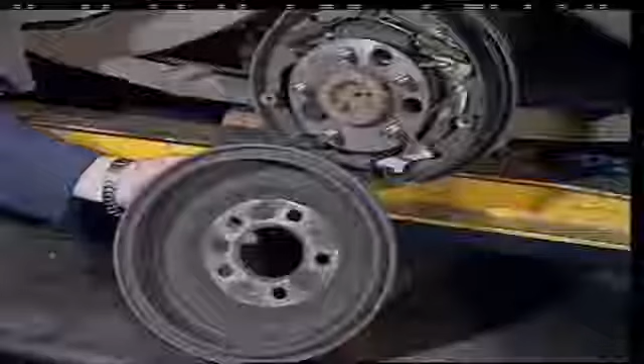This section examines the operation of the drum brake. Drum brakes were once common on all wheels of light vehicles. But on modern designs, they are usually found on just the rear wheels, in disc drum combinations.

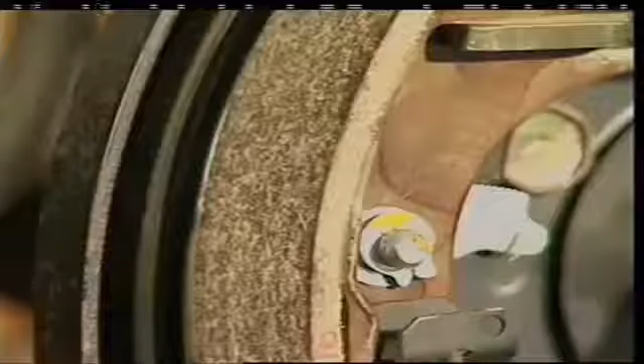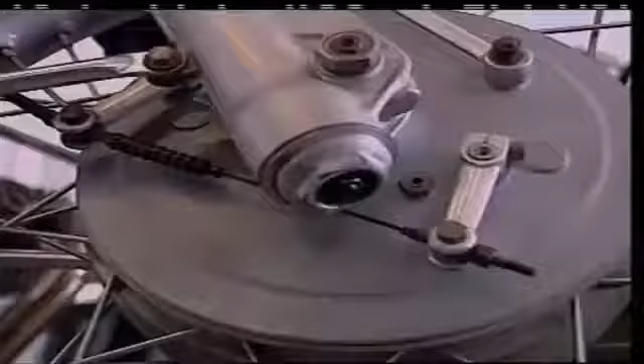The drum brake has two brake shoes with a friction material called a lining attached. These shoes expand against the inside surface of a brake drum and slow the wheel down. The harder the linings are forced against the brake drum, the higher the braking force that is applied. They can be expanded mechanically or hydraulically.

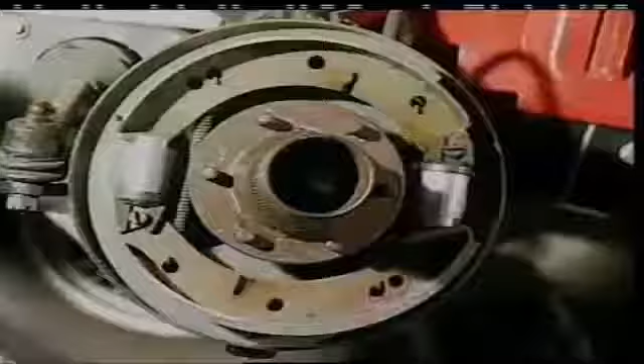The main advantage claimed for drum brakes is that the shoe mountings can be designed to assist their own operation. This is called self-energizing. Less hydraulic pressure is then needed to stop the vehicle, which is why many older drum braked vehicles didn't use a brake booster.

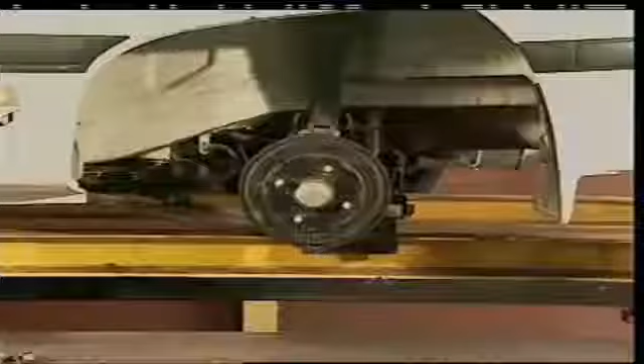The main disadvantage of drum brakes is that the friction area is almost entirely covered by lining, so most heat must be conducted through the drum to reach the outside air to cool. With hard use, this can cause overheating and eventually brake fade. Brake fade is the gradual loss of brake stopping power during prolonged or strenuous use. Very high temperatures occur at the brake drum, and that causes a deterioration in the frictional value of the lining or pad material. It's common in drum brakes.

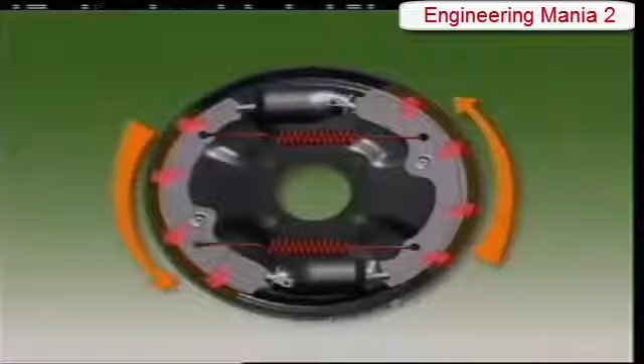Another problem with drum brakes is that it is difficult to get water out of the drum. If a vehicle is driven through water, it takes longer to get the brakes working effectively. Three brake designs are in general use: single leading shoe, twin leading shoe, and duo servo. Each one uses the wedging or self-energizing action of the brake shoe to assist the lining to grip the rotating drum when the brakes are applied.

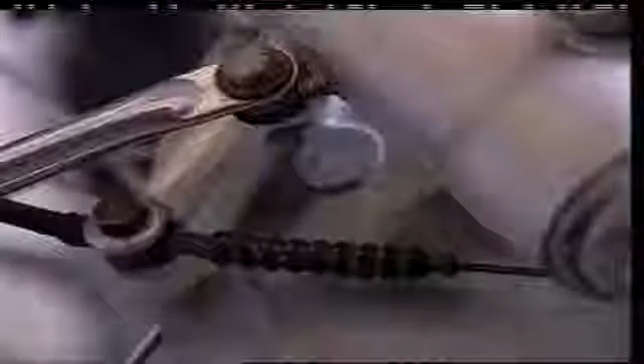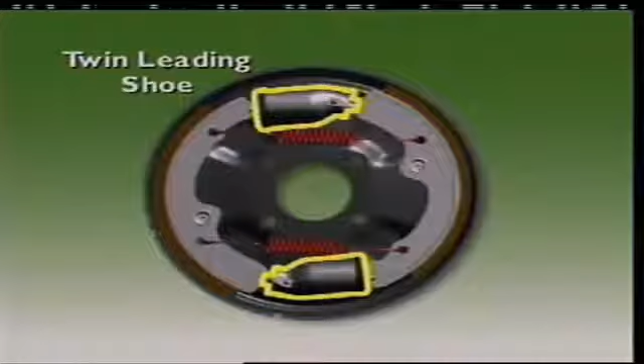The twin leading shoe has an actuator for each brake shoe. The actuator can be mechanical. However, a hydraulic actuator is popular on light vehicles. The hydraulic actuator is called the wheel cylinder. This arrangement has two wheel cylinders with one piston in each cylinder. When the brakes are applied, hydraulic pressure forces each piston to move outwards, pushing on one end of the brake shoe. The direction of rotation of the drum produces a wedging action on both brake shoes, so they are both called leading shoes.

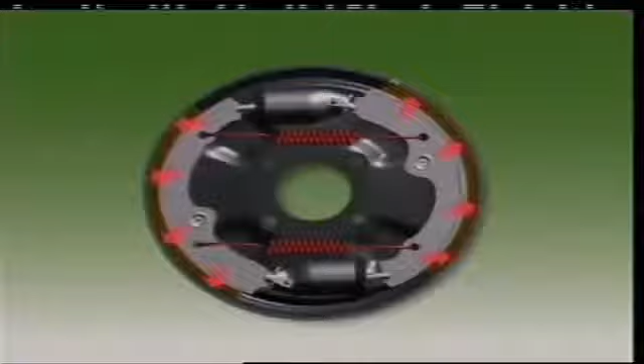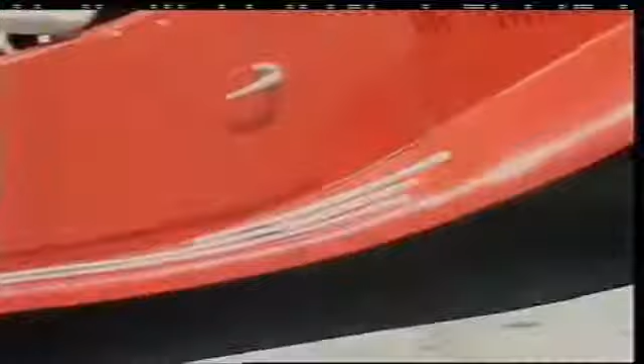This system was once popular on front wheels because it is very efficient in the forward direction. This is due to the self-energizing or self-wedging action of the shoes as the drum rotates. Its main disadvantage is that it is only about 30% as efficient in reverse, so it is usually combined with a single leading shoe arrangement on the rear to provide a balanced system. The single leading shoe system uses a single wheel cylinder with two pistons.

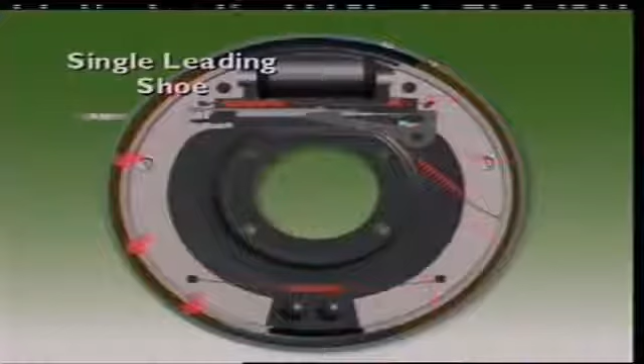When the brakes are applied, both shoes press against the brake drum. One shoe is called the leading shoe, the other is called trailing. The leading shoe tends to be self-energized, while the trailing shoe tends to be forced off the drum. This arrangement is common on rear wheels as they work equally well in forward and reverse, so it makes an effective handbrake. They can also have a self-adjusting mechanism.

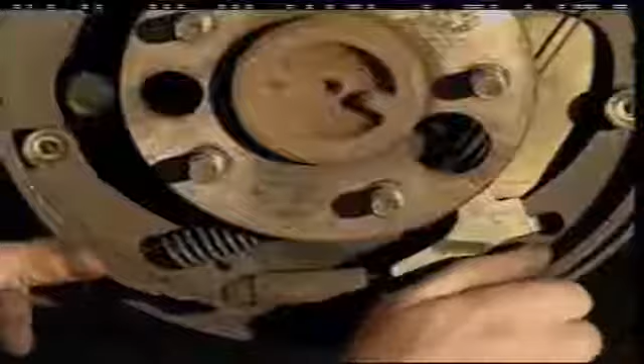The duo servo design also uses one wheel cylinder with two pistons. It is a high energy brake, that is, it exerts large self-energizing forces. The lower ends of the shoes are linked but aren't firmly anchored to the backing plate. This lets the complete shoe assembly float within limits. When the brakes are applied, both shoes are carried around by the drum until the secondary shoe contacts the anchor pin. The self-energizing force of the primary shoe and its wheel cylinder application force is now transferred to the secondary shoe through the lower linkage. Force is then being applied to the secondary shoe from both ends: the wheel cylinder at the top, and the linkage from the primary shoe at the bottom.

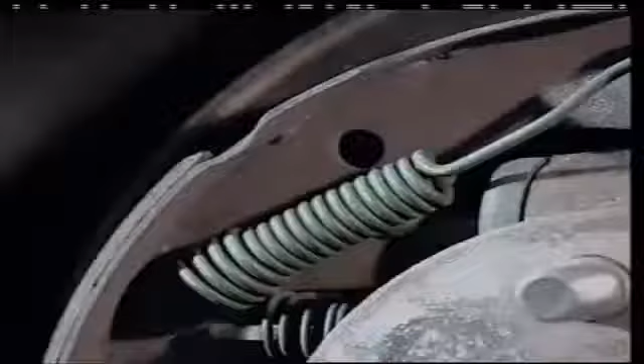The primary shoe has the shorter lining and is always fitted ahead of the wheel cylinder in terms of drum rotation. It's most important that the shoes are fitted correctly, since it's the secondary shoe that does most of the work. The linings may also have different frictional values. The colors of the retraction springs indicate different spring strengths. This design is common on rear wheels and it works well in both directions.

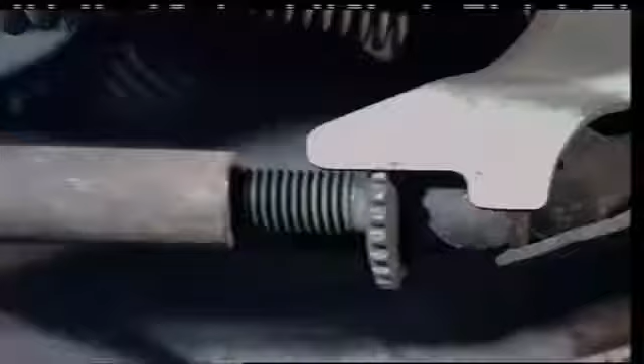Drum brake systems need to be adjusted to allow for wear of the lining. If they are not adjusted, pedal travel will be too long to be safe.

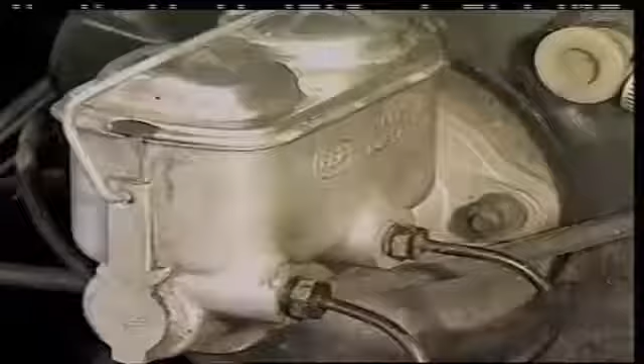This section examines divided systems for drum brakes. Modern drum braking systems use a tandem master cylinder to provide divided or dual line braking. A divided system is safer in the event of partial failure. Fluid loss in one half of the system still leaves the other half able to halt the vehicle, although with an increase in stopping distance.

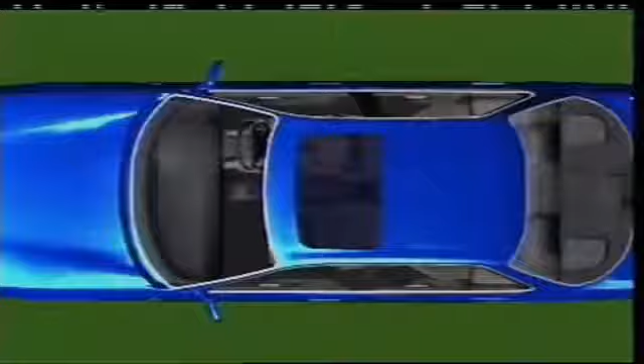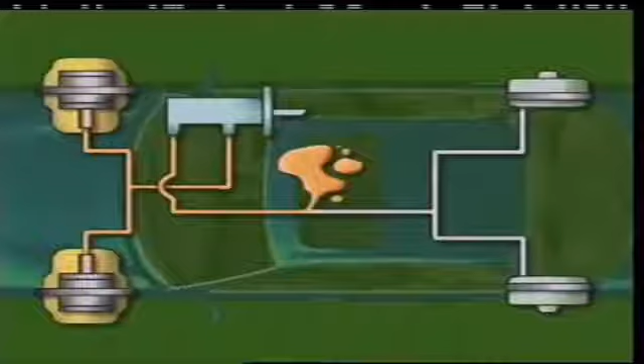A wheel's braking ability depends on the load it's carrying during braking. A front-engined rear-wheel drive car has around 40% of its load on its rear wheels, so its braking system can be divided in a vertical or front-rear split. This puts the front wheels in a different system from the rear wheels. If one half of the system fails, the front or the back, there's still enough separate braking capability left in the other half to stop the vehicle.

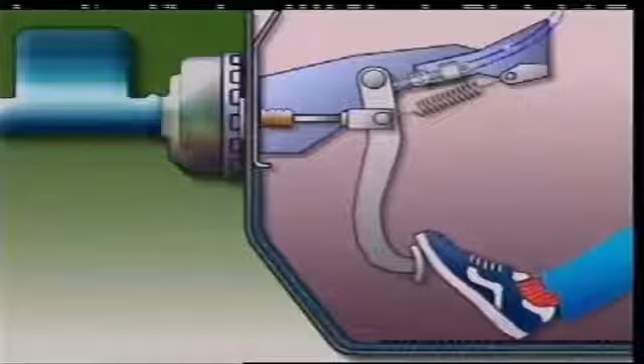This section looks at the brake pedal. The brake pedal uses leverage to transfer the effort from the driver's foot to the master cylinder. Different lever designs can alter the effort the driver needs to make. It is usually suspended from a bracket between the dash panel and the firewall. In many vehicles, the brake pedal is either connected to a switch or in contact with one. It operates the stoplights when the brake pedal is depressed.

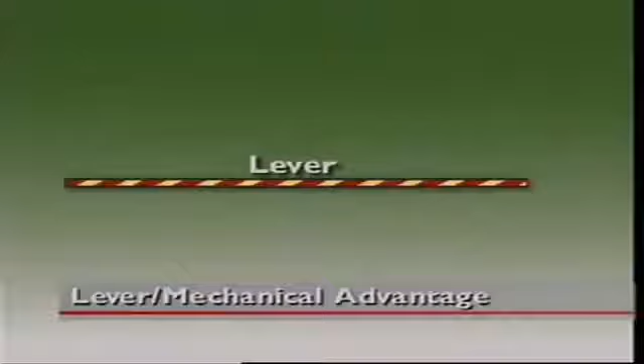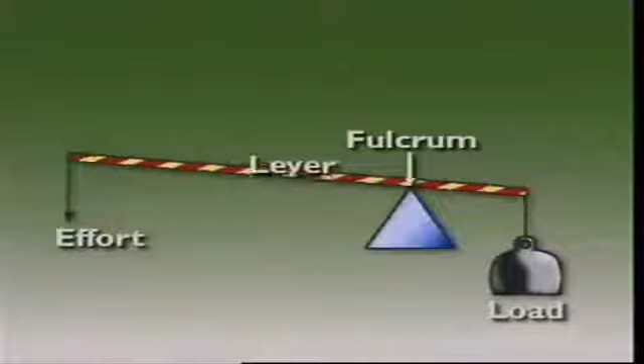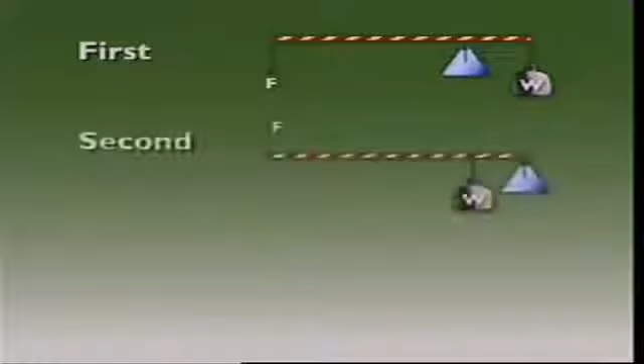A lever is basically a bar which is pivoted at some point called a fulcrum. An effort applied at some point on the lever overcomes a load at some point also on the lever. There are three basic types of lever: lever of the first order, lever of the second order, lever of the third order. They each have their own applications. The ratio of load and effort is called mechanical advantage. Using the right kind of lever in the right way allows a user to lift larger loads with smaller efforts.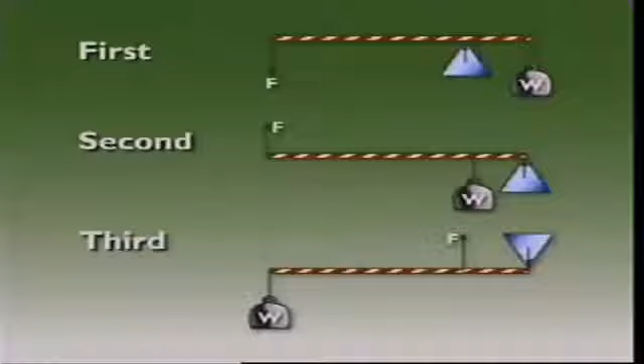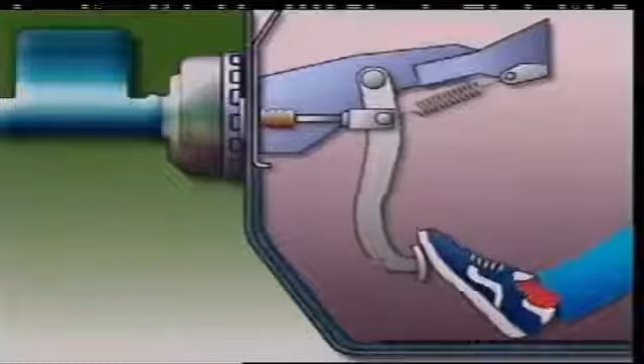This section looks at the master cylinder. The master cylinder is connected to the brake pedal via a push rod. This is a single master cylinder for a drum brake system. Its one piston has a primary and a secondary cup. These are also known as seals, because when force is applied to the brake pedal, the primary cup seals the pressure in the cylinder. The secondary cup prevents loss of fluid past the end of the piston.

An outlet port links the cylinder to the brake lines. An inlet port connects the reservoir with the space around the piston. A compensating port connects the reservoir to the cylinder ahead of the primary cup. With the brakes off, this port connects the brake system with the reservoir. It compensates for changes in volume of the fluid due to heat or wear.

The rod from the brake pedal pushes on the piston. It moves, closing off the compensating port and trapping fluid ahead of the primary cup. Any fluid trapped in the cylinder is then forced through a valve called a residual pressure valve into the brake lines. When the brakes are released, the master cylinder piston returns to its original position. When the piston fully returns against its stop, the primary cup uncovers the compensating port. Fluid ahead of the primary cup can now return this way to the reservoir.

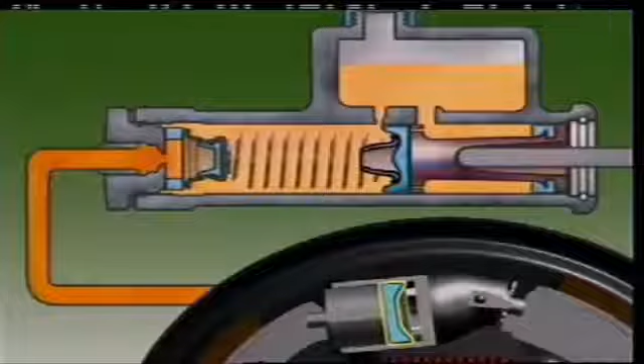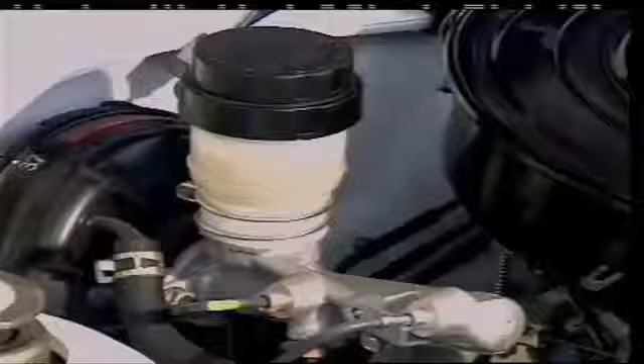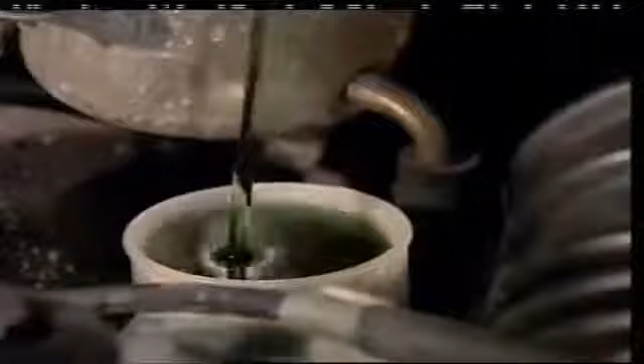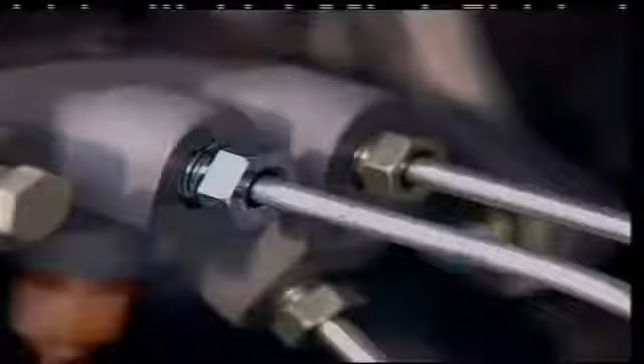With a basic master cylinder in the braking system, any loss of fluid, say because a component fails, could mean the whole braking system fails. To reduce this risk, modern vehicles must have at least 2 separate hydraulic systems. That's why the tandem master cylinder was introduced.

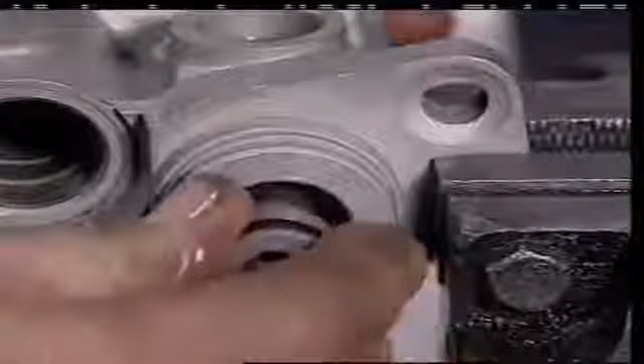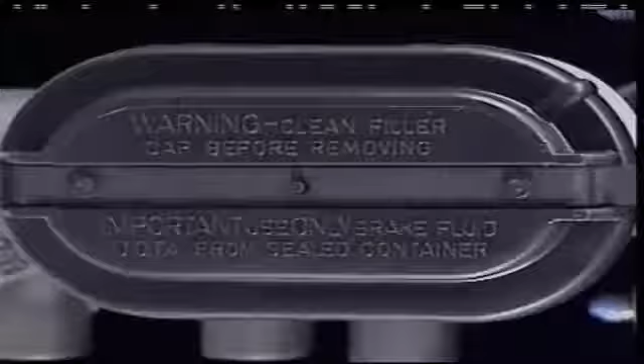Like 2 single piston cylinders end to end, a tandem cylinder has a primary piston and a secondary piston. Each section of the cylinder has inlet and outlet ports and compensating ports. There can be 2 separate reservoirs, or just one, but it is divided into separate sections. When the brake is applied, the primary piston moves and closes its compensating port.

Fluid pressure rises and acts on the secondary piston. It moves, closing its compensating port. Pressure builds up in this circuit. Both pistons then move and displace fluid into their separate circuits and apply the brakes.

If there is a failure in the secondary circuit, the primary system continues to operate normally, but with increased travel. If the primary circuit fails, no pressure is generated to move the secondary piston. So a rod attached to the front of the primary piston will push the secondary piston directly so that it still operates.

A switch can warn of loss of pressure in the front or rear circuits. Or one that warns of low fluid level can be fitted to the reservoir.

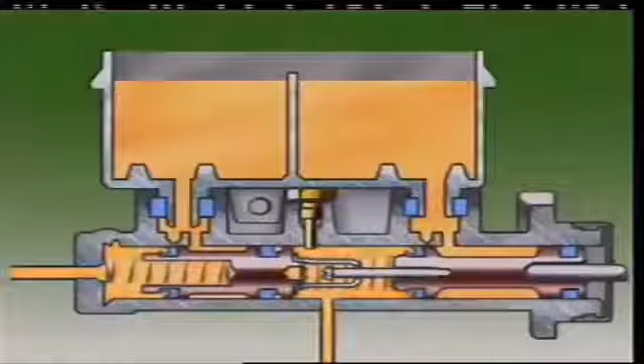The tandem master cylinder, just like the single piston master cylinder, can have problems with the low pressure area developing when the piston returns quickly but the fluid lags. The tandem master cylinder overcomes this by using grooves in the side of the primary cup. These grooves allow fluid to flow from the inlet port into the low pressure area.

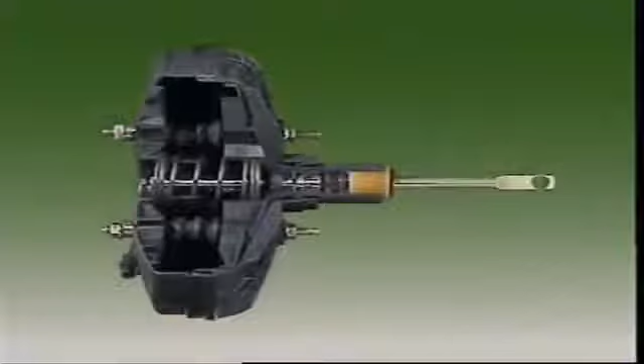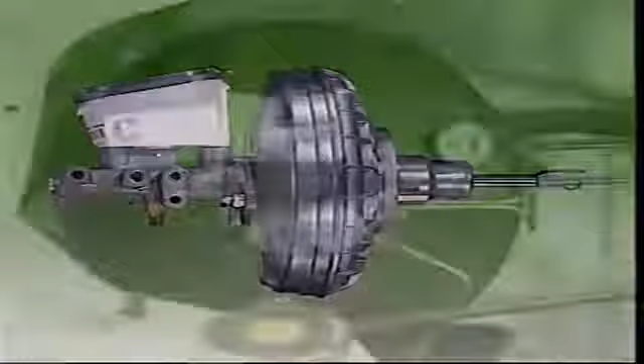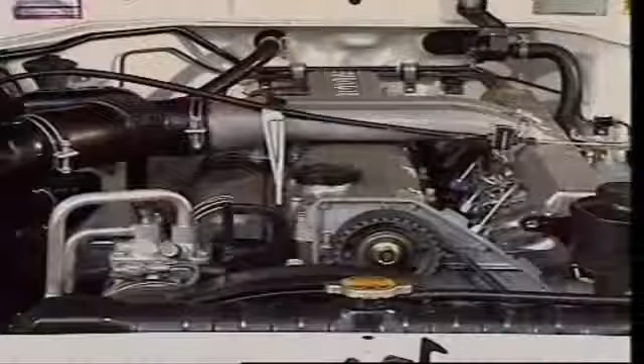This section examines the power booster. A power booster or power brake unit uses a vacuum to multiply the driver's pedal effort and apply that to the master cylinder. This increases the pressures available from the master cylinder. Units on petrol engines use the vacuum produced in the intake manifold. Vehicles with diesel engines cannot use manifold vacuum, so they are fitted with an engine-driven vacuum pump.

The most common booster now operates between the brake pedal and master cylinder. It increases the force that acts on the master cylinder. Whenever the pedal is depressed, the power brake unit assists the driver. The level of assistance depends on the pressure applied.

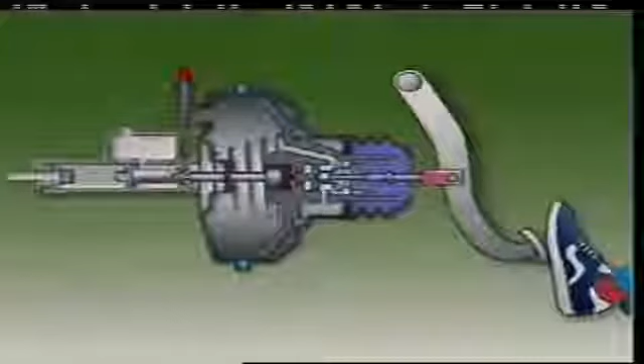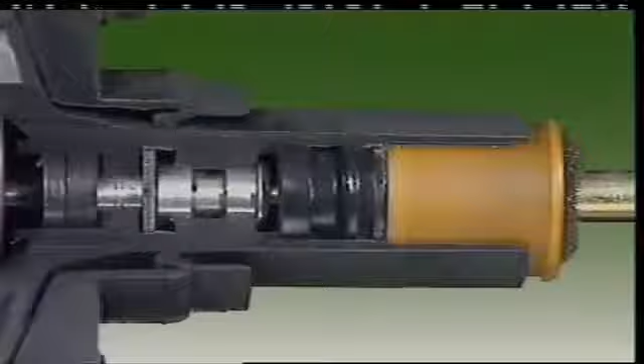When the driver moves the brake pedal pushrod, it transmits movement through the power unit to the master cylinder piston to apply the brakes. It also operates a control valve that admits air at atmospheric pressure to the rear of the unit. How it works depends on the position of the pushrod.

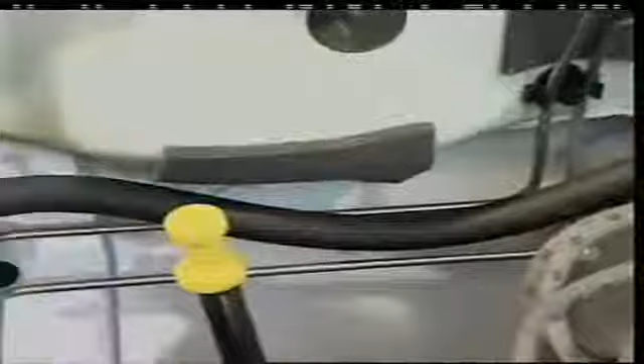A hose connects the intake manifold to a vacuum check valve on the power unit. With the engine running, the vacuum in the intake manifold is used to evacuate the power unit. This valve is held off its seat and a vacuum is produced in both chambers of the unit. The chambers are separated by a flexible rubber diaphragm attached to the diaphragm plate. It is held in the off position by a diaphragm return spring. The master cylinder pushrod and the control valve assembly are centrally located on each side of the plate.

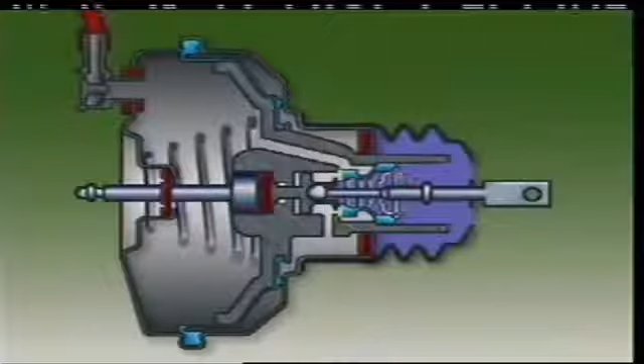As the brakes are applied, the pedal pushrod and plunger move forward in the diaphragm plate. This brings the control valve into contact with the vacuum port seat. It closes the vacuum port, sealing off the passage connecting the chambers. Further movement of the pushrod and plunger moves the air valve away from the control valve to open the atmospheric port. Air at atmospheric pressure comes into the air filter and passages and enters the chamber at the rear of the diaphragm.

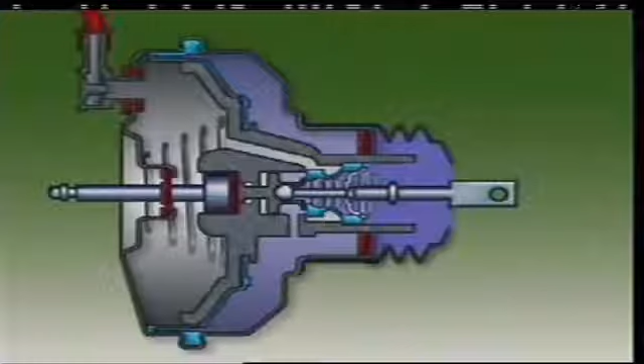The difference in pressure now on both sides of the diaphragm moves the diaphragm plate forward, and it takes the master cylinder pushrod with it. Hydraulic pressure builds up in the brake system to operate the brakes. As pressure rises, a counterforce acts through the master cylinder pushrod and the reaction disc. This counterforce acts against the plunger and pedal pushrod. It tends to move the plunger slightly to the rear, and it closes off the atmospheric port.

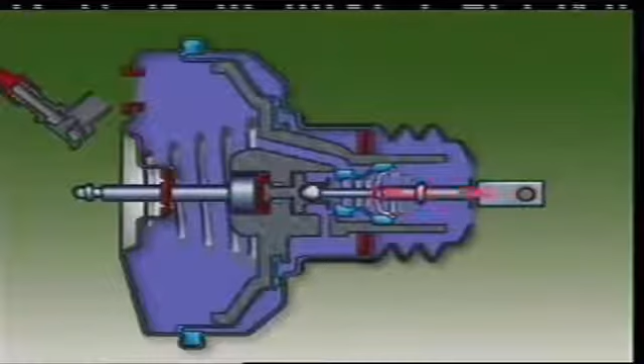If the vacuum source is interrupted, then as the pedal is pushed down, the pedal pushrod and plunger assembly come in contact with the reaction disc. This forces the master cylinder pushrod forward to operate the brakes. The pedal force needed then is much greater than with vacuum assistance.

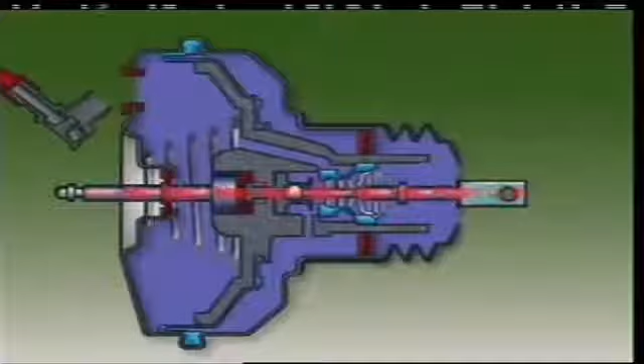During application, the reaction force against the valve plunger works against the driver to close the atmospheric port. With both the atmospheric and the vacuum ports closed, the power unit is in a holding position. It stays this way until increased pedal force reopens the atmospheric port, or a drop in pedal force reopens the vacuum port. With the force on the pedal held constant, the valve returns to the holding position. But if the pedal is fully applied, the plunger moves away from the control valve to open the atmospheric port and give full power application.

When the brakes are released, vacuum returns to both sides of the diaphragm, so the spring releases the brakes. When the engine is switched off or stops for any reason, no vacuum is available. The vacuum remaining in the booster, held by the non-return valve, will provide for at least one power-boosted application. After this, the brakes will still operate, but without power assistance, they require more effort from the driver.

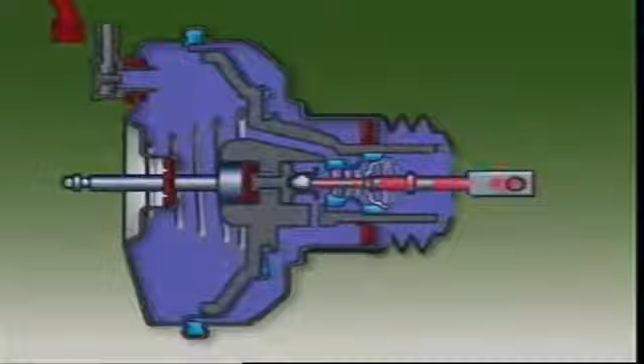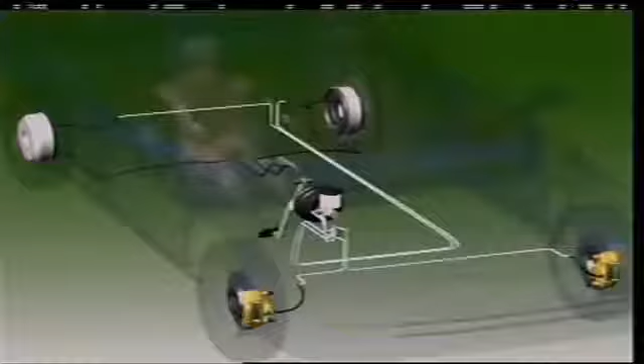This section looks at the emergency brake for a drum brake system. All vehicles must be fitted with at least 2 independent systems. They were once called the service brake and emergency brake. Now they are usually referred to as the foot brake and the park brake.

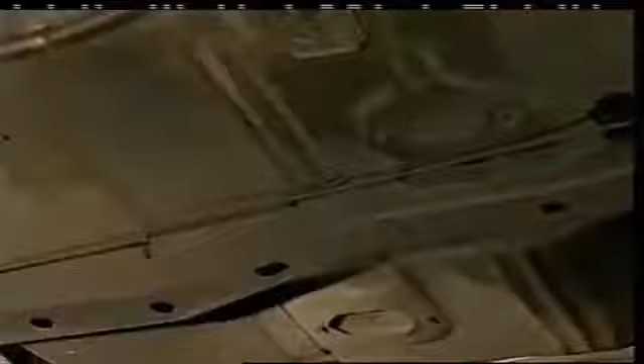Most light vehicles use a foot brake that operates through a hydraulic system on all wheels, and a hand-operated brake that acts mechanically on the rear wheels only. One common use of the handbrake system is to hold the vehicle when it is parked. The systems are designed to be independent so that if one fails, the other is still available.

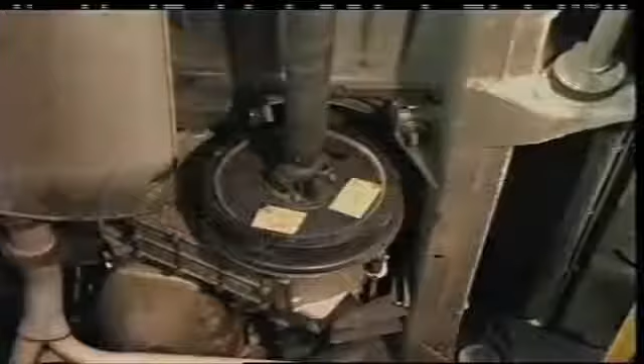This light commercial vehicle uses a single drum brake on the rear of the gearbox as a handbrake. It's sometimes called a transmission brake. On this duo-servo drum brake, the cable for the handbrake lever pulls on an actuating lever inside the brake drum assembly. The actuating lever is connected to the secondary brake shoe by a pin and to the primary shoe by a strut. Movement of the lever forces both shoes against the drum.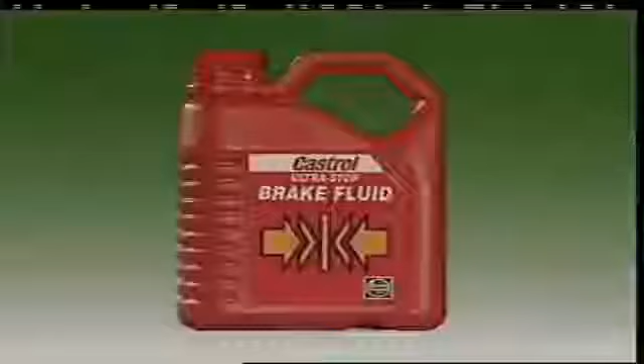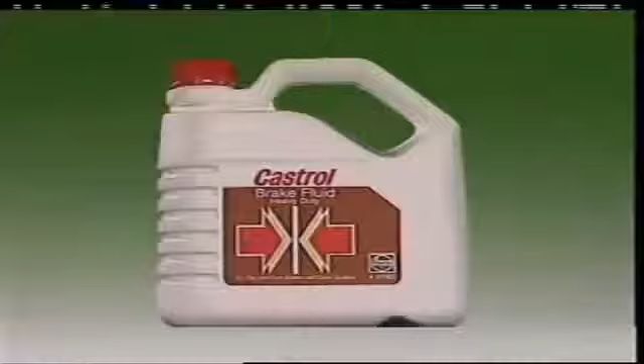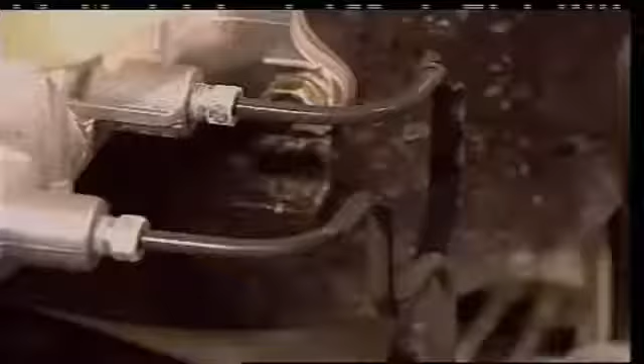This section examines brake fluid. The brake fluid transmits hydraulic pressure from the master cylinder to the wheels. It is a special fluid with special properties. Most are a mixture of glycerin and alcohol, called glycol, with additives to give it the characteristics that are needed. It must have the correct viscosity for hot and cold conditions. Its boiling point must be higher than the temperature reached by the system. It must not damage seals, gaskets or hoses or cause corrosion.

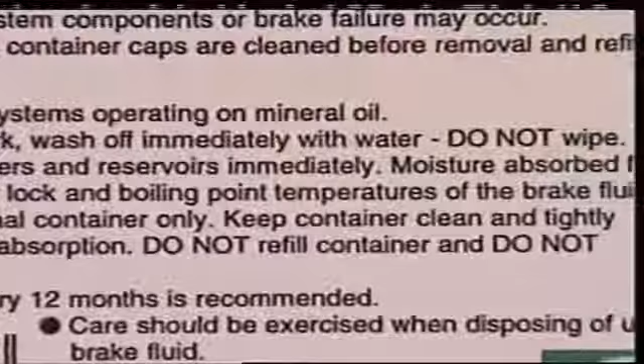Glycol-based fluids meet most requirements, although they do damage paint. And they absorb moisture, hence the warnings. This is important because as moisture is absorbed, it lowers the boiling point of the fluid. Brake fluid should not be mixed with mineral-based oils or solvents. If contamination is suspected, the braking system must be drained and flushed with a suitable solvent and rubber components replaced.

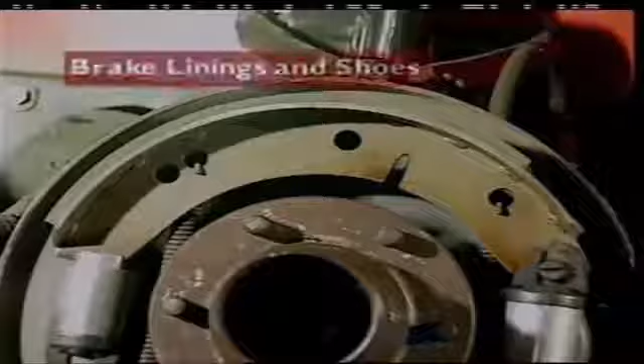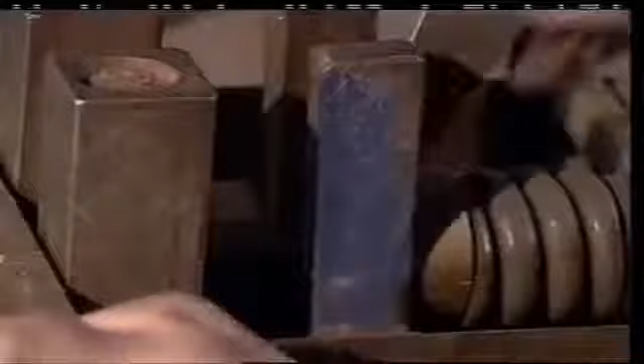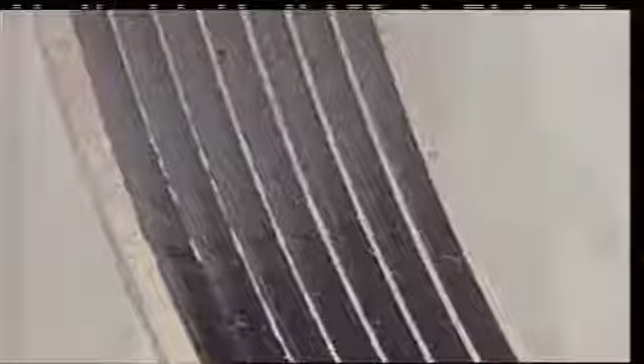This section examines brake linings and shoes. The drum brake uses brake shoes that have friction material called linings attached to them. This friction material was once made of asbestos, but concerns about health problems associated with asbestos have led to increasing use of non-asbestos alternatives. Linings can be riveted or more often bonded to the brake shoes. The composition of the friction material affects brake operation.

Linings which provide good braking with low pedal pressures tend to lose efficiency when they get hot. This means the stopping distance will be increased. Linings which maintain a stable friction coefficient over a wide temperature range generally require higher pedal pressures to provide efficient braking. This may necessitate the use of a booster.

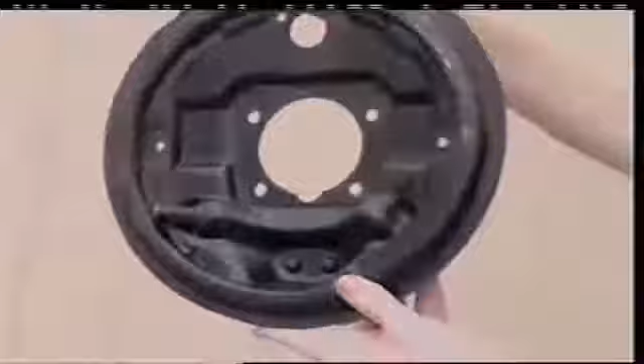This section examines the backing plate. All of the brake unit components, except the brake drum, are mounted on a backing plate bolted to the vehicle axle housing or suspension. The backing plate is usually pressed from heavy gauge steel. It has a raised outer edge that fits into a groove or recess in the brake drum and helps keep out any dust or dirt. Some vehicles have manual brake adjusters, so openings are usually provided to allow for adjustments without having to remove the wheel and brake drum.

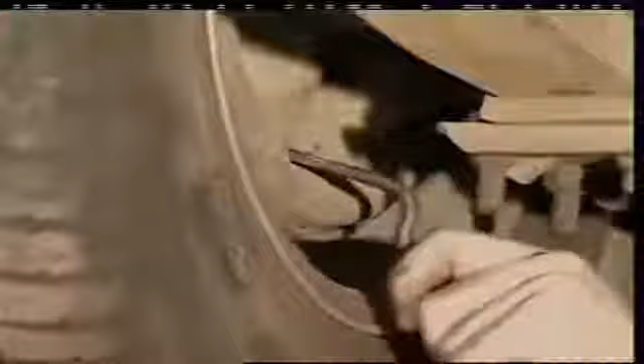This section examines the wheel cylinder. The wheel cylinder is located inside the brake drum and bolted to the backing plate. It converts hydraulic pressure from the master cylinder into mechanical force that pushes the brake linings against the brake drum. Some have a double cylinder with a piston at each end. Others have a single piston with one end of the cylinder closed off.

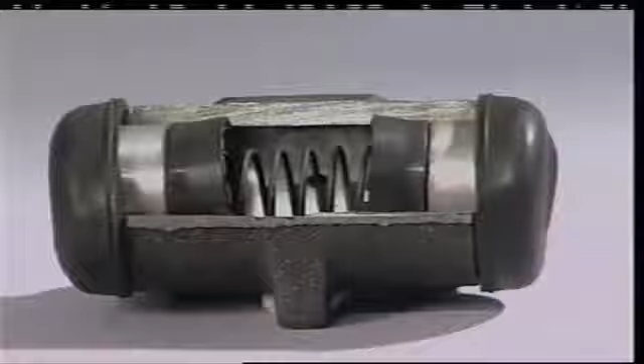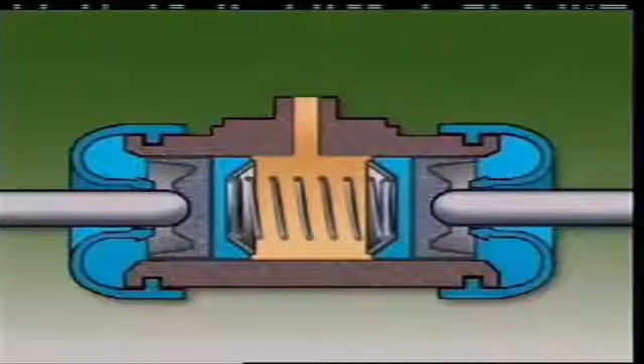They are usually made of cast iron or aluminium alloy. Some are sleeved with stainless steel to be longer wearing and more resistant to corrosion. The wheel cylinder cups seal the cylinder against fluid loss. They operate under difficult conditions of extreme pressures and temperatures. They may be fitted with a spreader and light expansion spring to keep the lips in contact with the cylinder during retraction and while at rest. This helps keep air out of the system.

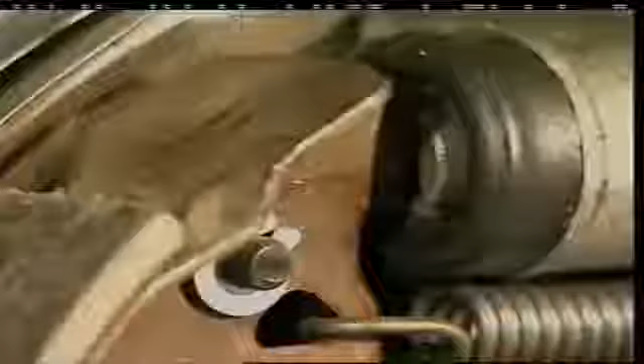Most wheel cylinders are fitted with bleed nipples to allow air to be bled from the system after assembly. A flexible cover or boot allows for piston movement and also keeps out dust and moisture.